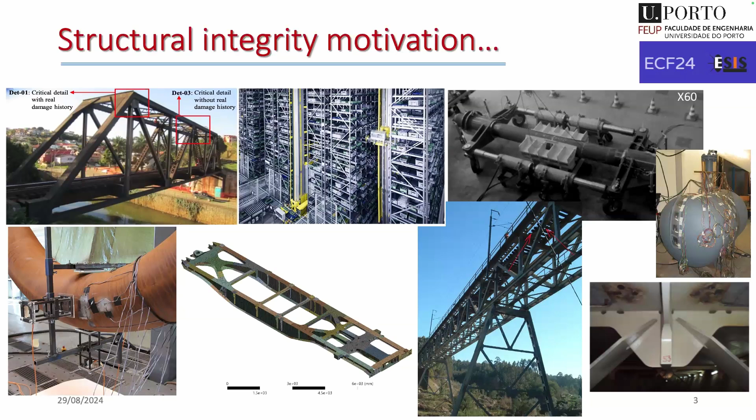So this is the way we get funds for our research.

I will make my presentation according to these topics. I will start with some introduction to the local fatigue approaches. Then I will show you some developments that we were involved in as a team regarding these local fatigue approaches, with some focus on modeling fatigue uncertainty. This is one of our topics.

Then I will jump to a more recent activity in our team that has been very discussed this week in this conference, which is ultra-high cycle fatigue. We are doing some activity in this, and I will show you some of the most recent results that we are generating. Then I will jump to the structural integrity case studies, where we try to solve different problems, applying the local approaches.

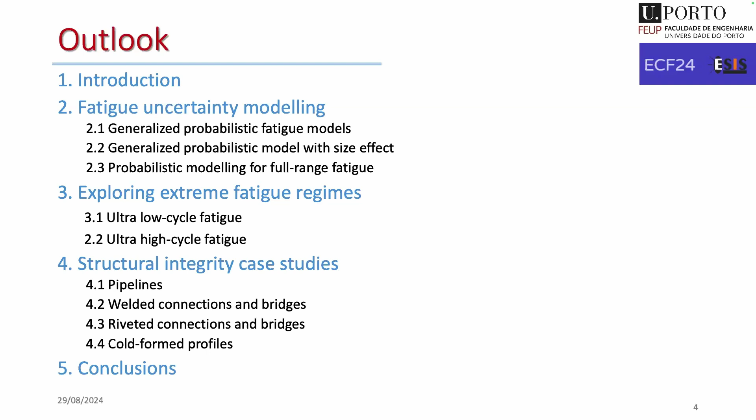Also solving some problems of scale, because when we are analyzing large structures and we want to apply local fatigue approaches, we must overcome the scale problem between the size of the structure and the need to characterize locally the fatigue parameters.

Regarding introduction, everyone here knows what the local fatigue approaches are, but just to give some background information. Traditionally, when we want to make structural integrity design or analysis relying on design codes, we are often directed to the application of global approaches, which are simplified versions for fatigue analysis.

In this case, the stresses, for example, are nominal, which means that we are far from the hotspot where the fatigue damage will start or evolve. These are the global approaches, which currently are still the basis for many design codes.

Anyway, design codes are evolving, and some codes are already incorporating some approaches closer to the local approaches, particularly including more local stress definitions like the geometric stresses, the structural stresses, or the hotspot stresses. So this is, in my opinion, a way going to the local approaches.

And maybe it's where most of us are working in our research: developing local models for fatigue assessment using local fatigue parameters, which are more consistent with the nature of the fatigue damage, which is very localized in the material.

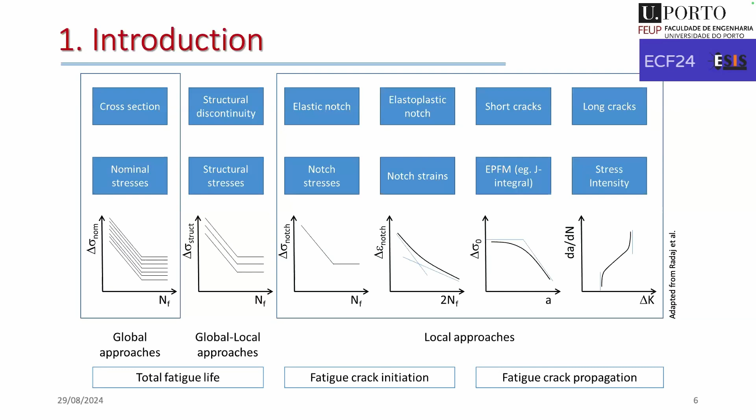For example, fatigue crack initiation could be one of the focus. Sometimes in other applications, we are more concerned about fatigue crack propagation. And sometimes we try to combine those approaches to get a full fatigue life prediction. So this is what I understand, in my feeling.

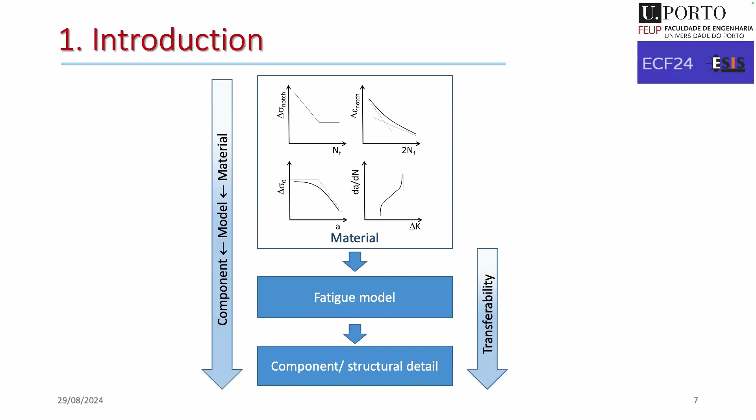The issue is that we start with material characterization, and then we need a fatigue model. And with that, we can predict the fatigue of a structural component. So that's what I call the transferability problem between the material and the structural component or detail. That's what I will try to show how we are doing in our team later on in this presentation.

So local approaches, as I said, most of us are working in that topic. It's almost a world inside this. Anyway, I believe we still have work to do. There are still challenges to overcome in the local approaches. So there is an exhaustive list of challenges that we need to address.

Complexity of modeling is a problem when we are challenged by industry to give clear answers about, for example, structural integrity of a bridge. Can we go to the grain scale modeling to provide that answer to the industry? This is a challenge, because if I go to the grain scale, maybe I will not provide the answer within the time I have to give to the industry.

Also, that will require very high computational resources that we must have available to provide the answer to our customers. So usually local approaches face the complexity in modeling much more nowadays, which requires in parallel high computational intensity.

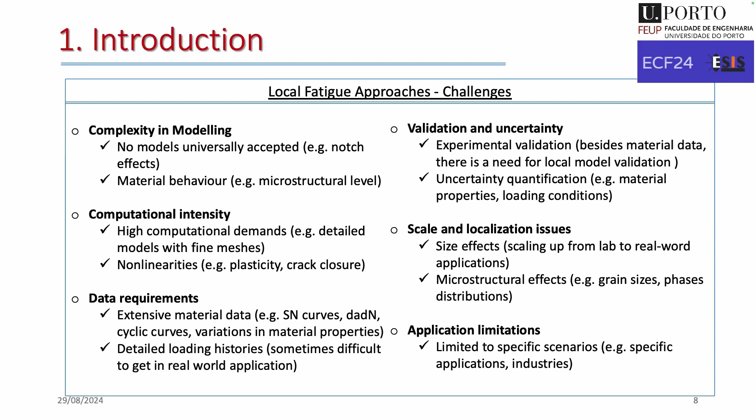We always have the problem of scale and localization issues when we start with the material and want to go to the structure. And sometimes our models are limited to specific fields, case studies, or industrial requirements.

Before going directly to the structural integrity case studies I want to show you later on, I will first go through the modeling of fatigue uncertainty, and then I will talk about some research work on extreme fatigue regimes.

As I told you, our work has been done in collaboration with different partners across the world. We started a collaboration about 20 years ago with Professor Canteli and Professor Castillo from the north of Spain. They developed a simple and powerful probabilistic model based on the well-known Weibull distribution, but for fatigue analysis.

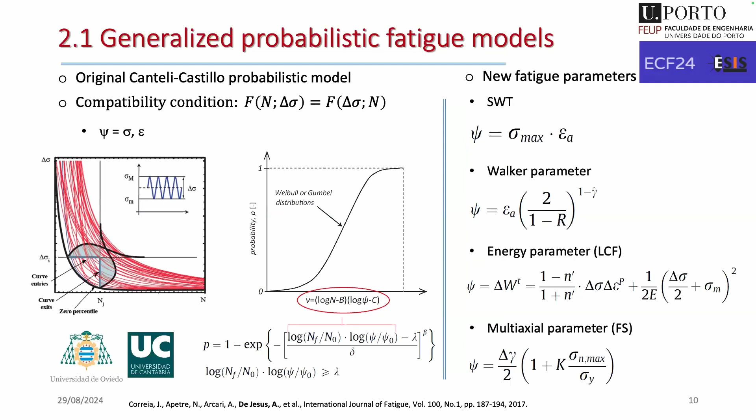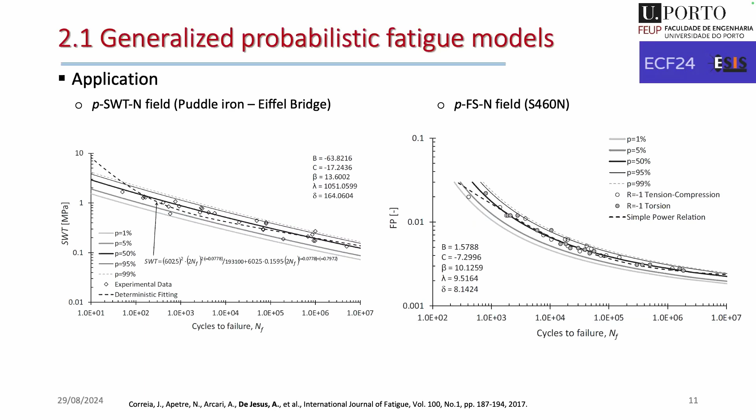So this was immediately explored in different fields and different materials. For example, materials from old bridges in Portugal with the SWT parameter, or multi-axial fatigue with structural steels were explored.

Afterwards, we applied this fatigue S-N field, though it could use different parameters on the y-axis, to model the fatigue behavior of notch components, assuming that the fatigue life is a propagation of a crack, and that crack propagation results from successive crack reinitiations across a crack path. Starting with the material model, we were able to predict the fatigue S-N field for the notch component.

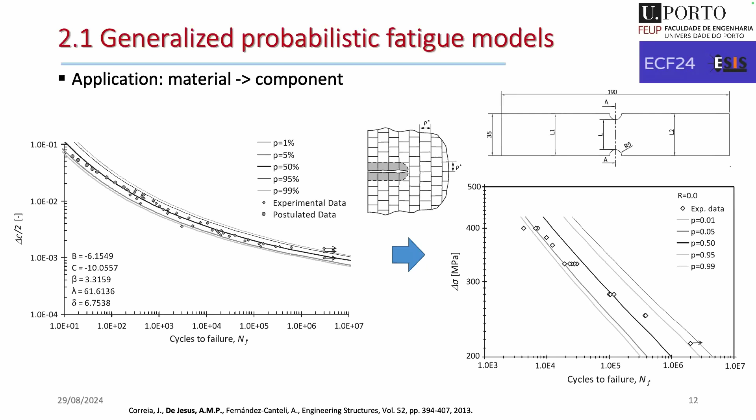A next step in this analysis was: the Weibull model was proposed early on for describing fracture stress in brittle materials. So we can benefit from that Weibull model description with our new fatigue parameter. This generalized parameter lets us benefit from the scale parameter, and we can approach fatigue prediction while accounting for scale effects or size effects.

So this delta parameter could be extended to this version, giving us our probabilistic model with this new perspective for size effect. This allows us to predict the reduction in fatigue strength as size increases, and also the scatter reduction for the same size increase.

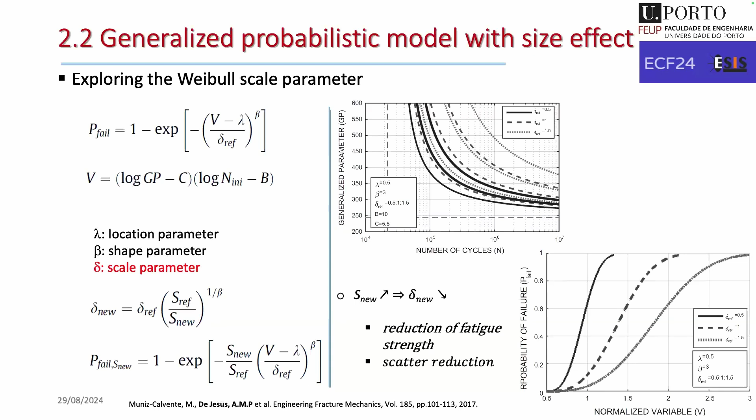Doing that, we started to model the fatigue behavior of some components—at that time I was working on riveted joints, so we modeled the fatigue behavior of riveted joints starting with the material properties, beginning with simple, smooth specimens.

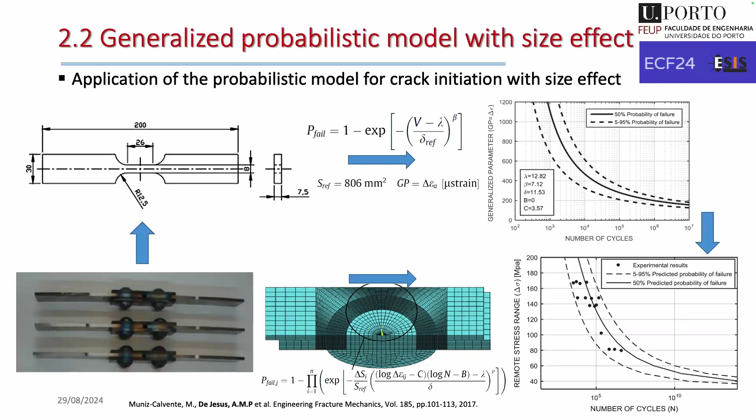We test those specimens and extract the reference probabilistic S-N field. Then, using numerical modeling of the joint and the weakest link theory, we're able to predict fatigue crack initiation for this riveted joint, as you can see on the right. So starting with material characterization, we jump to component prediction.

With this model, we can evaluate, for example starting with the fatigue parameter, a very simple strain range distribution over the surface of the riveted plate. We can get risk maps for the plate—for any given stress range and number of cycles, what will be the risk of failure of this component after this history.

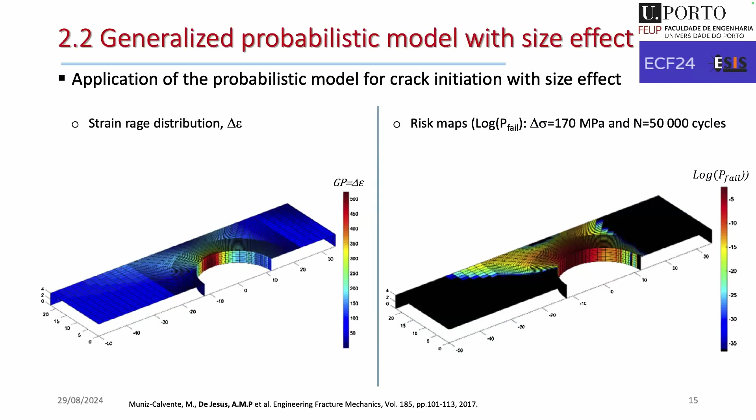One of the shortcomings of the original model proposed by Castillo and Canteli—well, actually it was understood in the original version as a shortcoming, but later we realized it might not be so. We can see here this hyperbolic S-N field, and this vertical asymptote seems to be physically inconsistent.

The other asymptote, the horizontal one, is okay because it resembles the fatigue limit of the material. And we should expect, when talking of the full S-N field, a sigmoidal representation for the material's fatigue behavior when using a stress-based fatigue parameter.

But after some considerations, we realized this model could be a transformation of that one. How can you do that? Simply by providing a new fatigue parameter.

So we can work with the maximum stress normalized by the material's tangent stiffness for the cyclic curve. As we move into the plastic behavior of the material, this normalization parameter will reduce significantly, and theoretically for a perfectly plastic material it will go to zero, giving us this asymptotic representation.

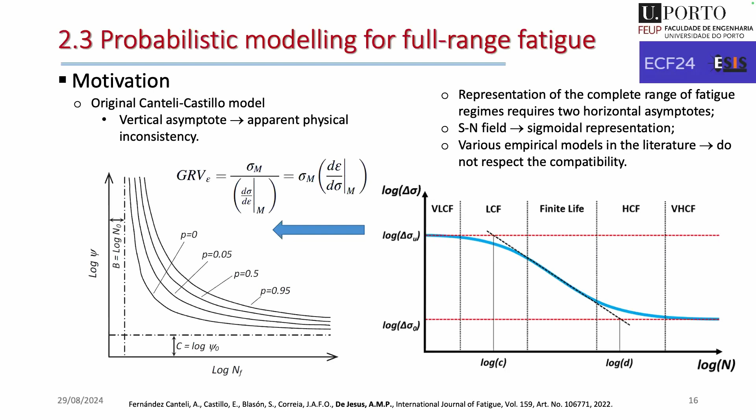So in the end, this makes sense—this hyperbolic representation can be used to jump to the sigmoidal representation. This was tried with existing data at the time; for this case, for the pressure vessel steel, we started with data.

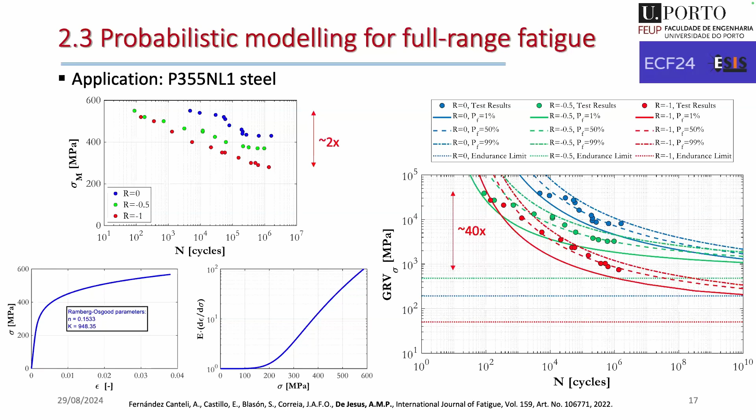In this with the maximum stress, we have a vertical range of test data of 2 times. When we make the transformation I referred to previously, we can extend this to 40 times. So we are retrieving the hyperbolic representation of our S-N field, as originally proposed by Fernandez, Castillo and Canteli.

So these are some experiences regarding the generalization of the existing probabilistic model by Canteli and Castillo. Now we were trying to explore the extreme fatigue regimes, and one of the regimes we were exploring was what we call the ultra low cycle fatigue.

Why this study? This was actually a European project interested in this topic. The objective was to investigate the behavior of, for example, pipelines under extreme loading conditions, those that appear under seismic actions. In that case, the failure of the material could happen very early, before 100 cycles.

For that, we believe we are not talking of low cycle fatigue classically speaking, but in this fatigue regime, as you can see on the bottom fractured surfaces, we have a mixture of crack propagation and some dimple formation, which is typical of static ductile failure. So we believe that in this region, traditional low cycle fatigue approaches like Coffin-Manson will not work properly. This is already documented in the literature, that Coffin-Manson will overestimate fatigue life predictions in this very short time duration.

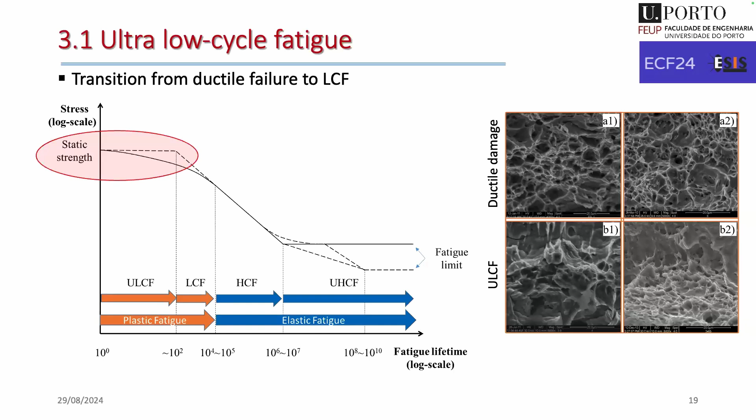In this European project, we already published a book with all the data. I'm just opening a small window into our work, so you can find a lot of testing data there, including full-scale tests, which are very rare, that you can benefit from in this book.

We also played with different models. We used continuum damage mechanics coupled models to address material damaging in this fatigue regime, which is affordable because we are talking of around 100 cycles, so it's possible to integrate the equations for that duration.

But today I bring a simpler model, just to make it easier to demonstrate the background idea of modeling in this fatigue regime. So here I'm talking of an uncoupled model that relies on very precise cyclic plasticity modeling—this is mandatory, otherwise we will fail in our predictions. Then we make some post-processing using this uncoupled model to try to anticipate what will be the crack initiation.

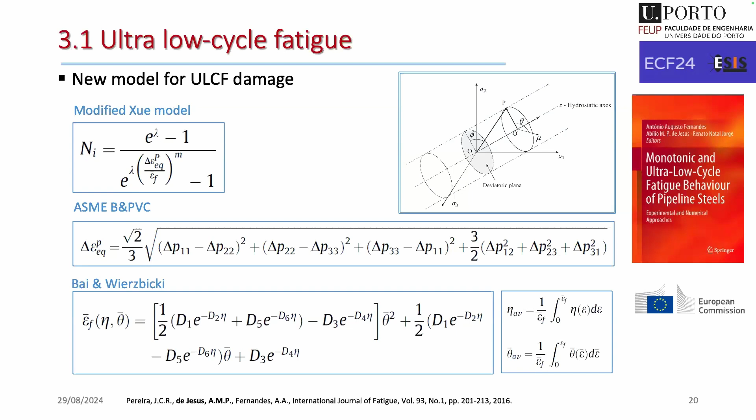For characterization and identification of the model, we rely on two sets of tests. First, on the left, we need static tests. Those static tests are important to define the fracture surface, or ductility surface, of the material, where we have fracture strain plotted against triaxiality and Lode angle, and you can see this is not constant for the material. Then we also need to run cyclic tests.

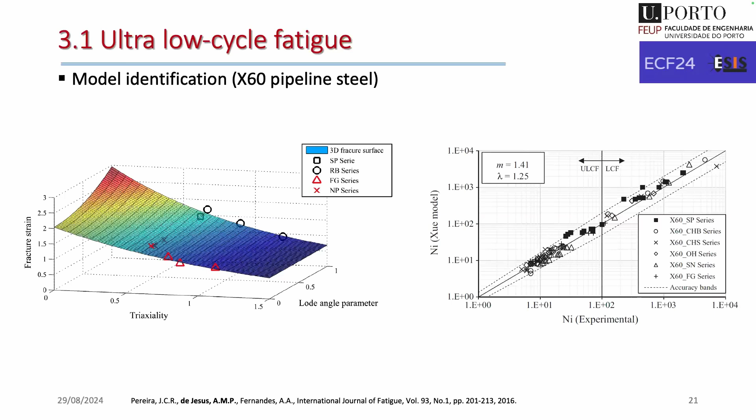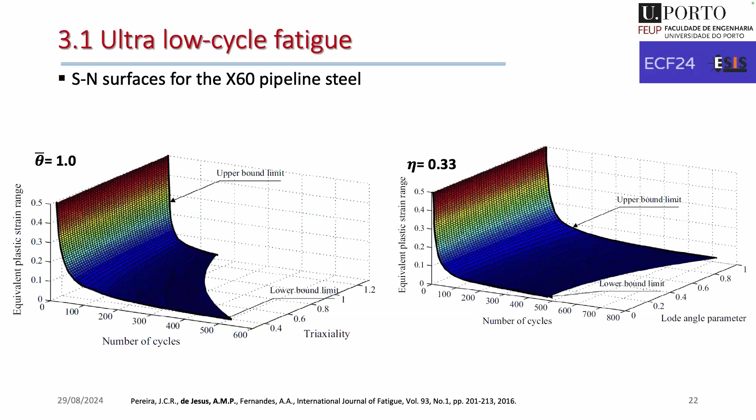Ideally for different stress concentrations or different triaxialities, in order to identify our model constants. With that, we can achieve a new idea for fatigue crack initiation in this fatigue regime, characterized by these surfaces. So we will have S-N surfaces where we are adding an extra dimension—triaxiality or Lode angle parameter—giving us a multi-dimensional surface for fatigue crack initiation characterization.

I will come later to this modified model for ULCF in the applications, when I show you some applications to pipelines. Now I will talk of more recent data. I was thinking to remove this from my presentation because it's supposed we should bring some more consolidated work, but anyway, I take the risk and bring some very fresh results about gigacycle fatigue that we've been working on for just 2 years or so. I'd like to share some advancements we are doing.

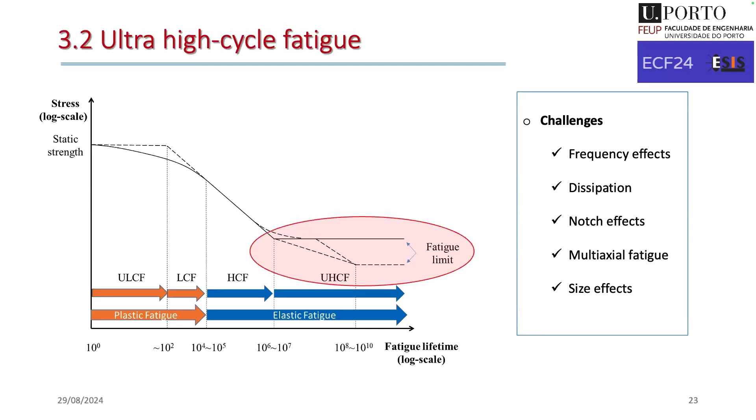There are a lot of challenges when we are doing gigacycle fatigue. We have frequency effects, dissipation, notch effects, multi-axial fatigue, size effects - all of this we need to address also in the gigacycle regime. Otherwise we will be very limited on the information we are generating. We are trying to solve this step by step. For the moment we just have preliminary results.

One of the challenges that I never heard people discuss so much is about dissipation. Everyone runs the test as if perfectly without any issues, but we don't feel that way. When we change material, dissipation will be different and we will have heating that we need to control. Otherwise our test will be rubbish.

We recently developed a thermal model that gives us information about whether dissipation will be an issue or not. We can use our test itself to get the damping coefficients of the material, and then injecting that in the heat transfer problem, we can get the prediction of the temperatures of our material.

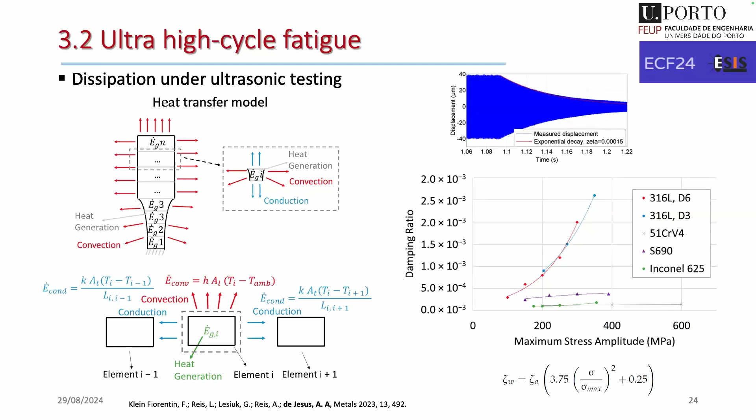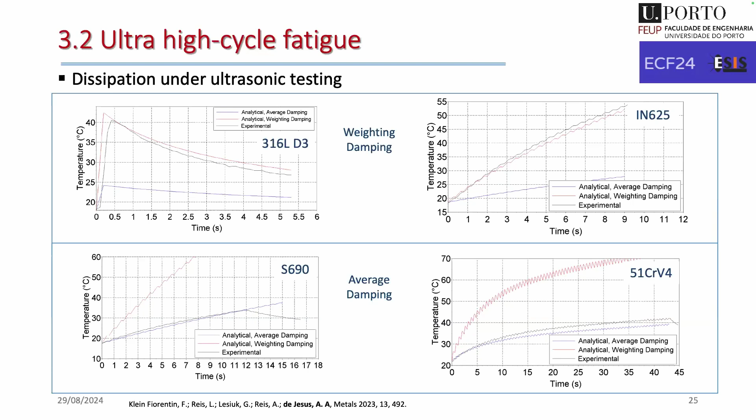We found that, maybe this is classical work, but for us it was interesting to demonstrate that depending on the material, the microstructure will change with the applied stress. So the damping coefficient is nonlinear with stress for some materials, while for others we can use an average damping to estimate the temperature. Using that, we were able to estimate the temperature evolution in the material before doing a very comprehensive characterization.

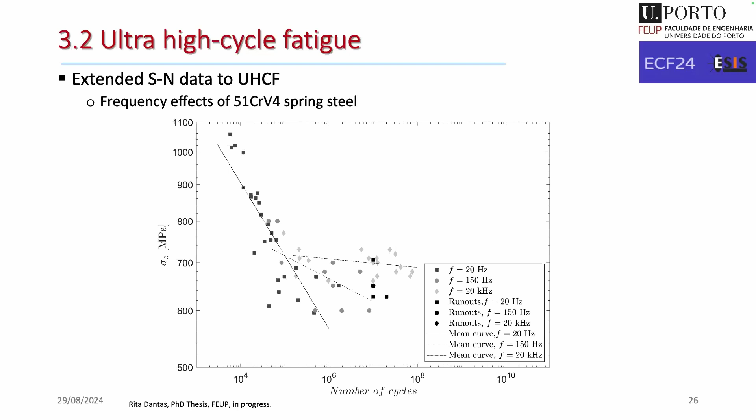Then the frequency effects - we all know that, and we are trying to get a phenomenological model that overcomes this issue. We have tests for spring steel for 20, 150, and 20 kilohertz. We see some influence of frequency that we are trying to overcome with a more complex regression model, going back to the basic model from

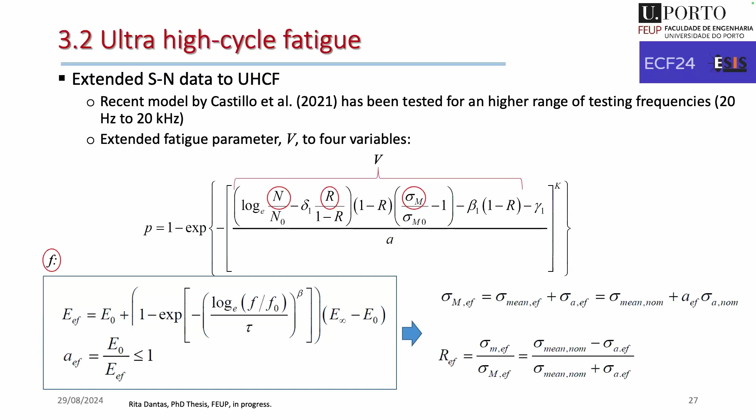Canteli and from Castillo. It's possible to change the V variable to a more complex one, in this case four variables, where the frequency appears implicitly through the influence of the elasticity properties of the material. This is a more intricate model but opens a lot of possibilities - we can get our S-N field for a wide range of fatigue lives, benefiting from different sources of data, and of course we are making a transformation in our fatigue parameter.

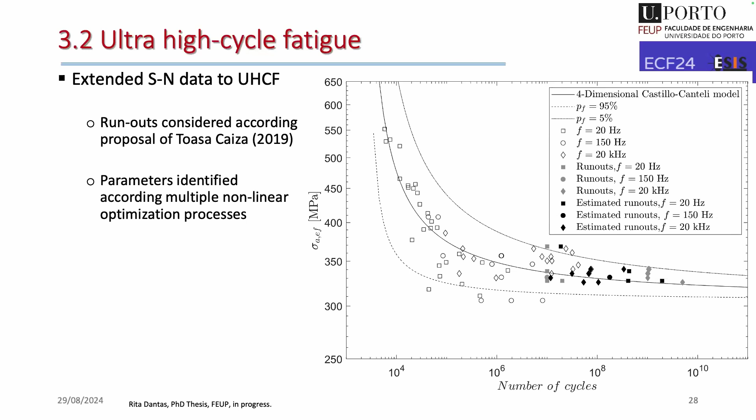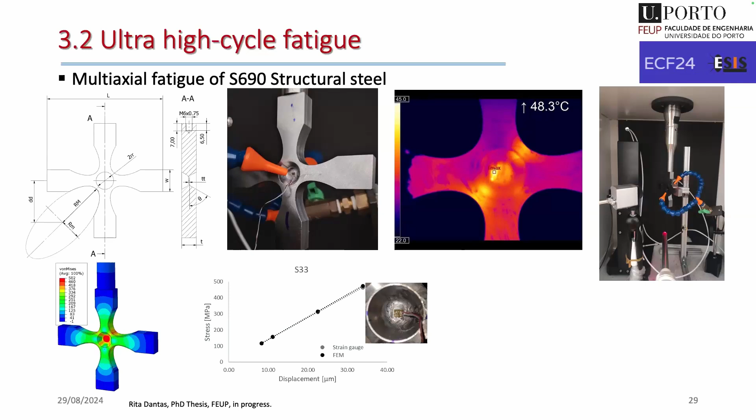Recently we succeeded in getting some multi-axial fatigue results - these are just preliminary results in the gigacycle regime, using cruciform specimens. We have some valid cracking in the specimens, but we still have to work and explore further. We will have to face the frequency effect, and in my opinion we'll also have to face the problem of the size effect.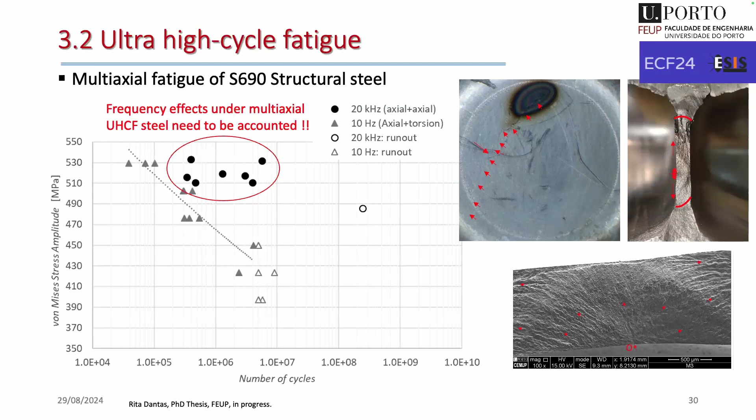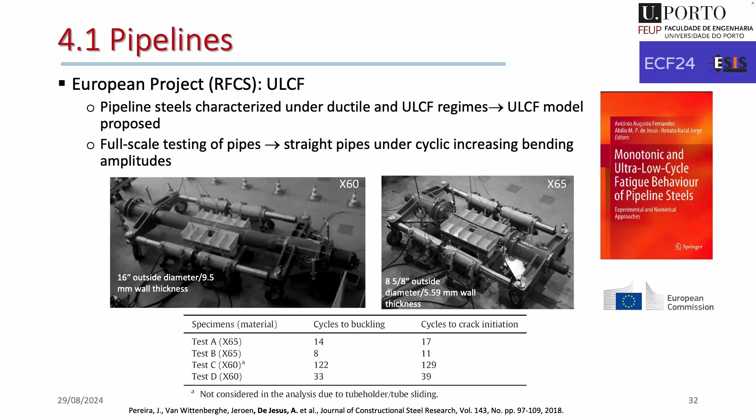Now I will run over our case studies very quickly, just to give you some highlights - sorry for rushing through this presentation. The first case was the pipelines again. In our project, we were able to run full-scale bending tests of straight pipelines and elbows - elbows are in the book. We were able to predict the fatigue behavior well with our model.

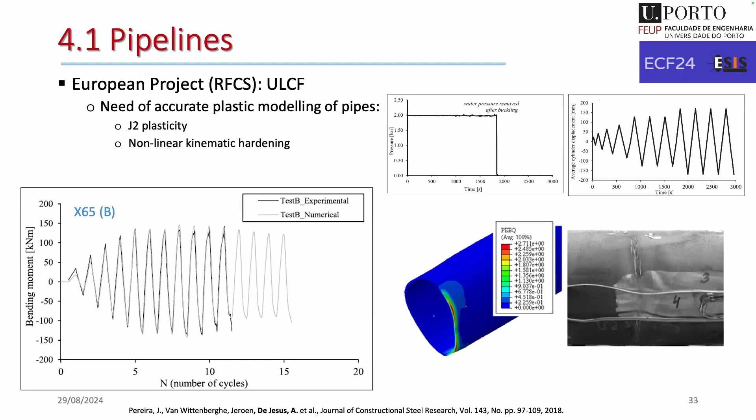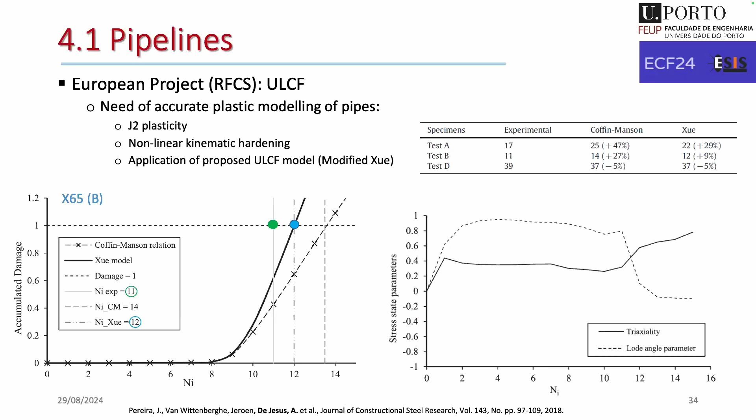But as I told you, we need to first model very precisely the elastoplastic behavior of the pipe. Most important is to capture the plastic instability, because as soon as you get plastic instability, your triaxiality will increase, the Lode angle will decrease - all of this pushes toward reduction of material ductility, which speeds up failure. So we were able to improve predictions regarding the overestimation from the Coffin-Manson approach.

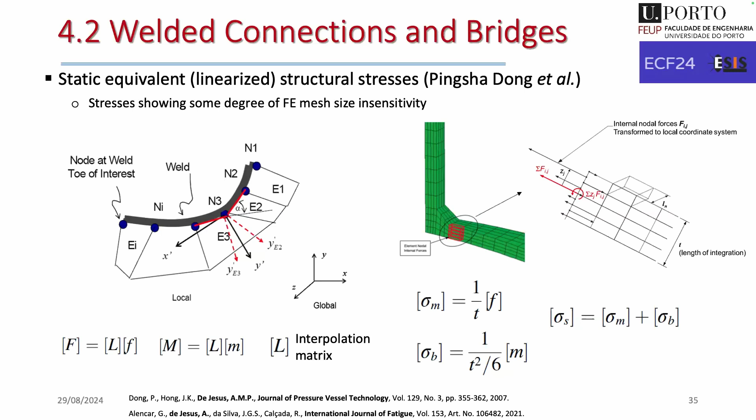Regarding now just a brief story about welded connections - I started some time ago a collaboration with the United States, with Battelle Ohio Institute, with the group of Pingsha Dong. At that time, Pingsha Dong developed the structural concept for stresses, which are defined as equilibrium equivalent with the nodal forces of the finite element model. In that way, the idea is to get some mesh insensitivity for the structural stresses definition.

Integrating the crack propagation law, accounting for the small cracks effect, and accounting for the stress intensity magnification factors for details typical on details, we were able to reach a master S-N curve with a new definition for the structural stress, which accounts for the stress linearization, the loading type, and the size of the plate under analysis.

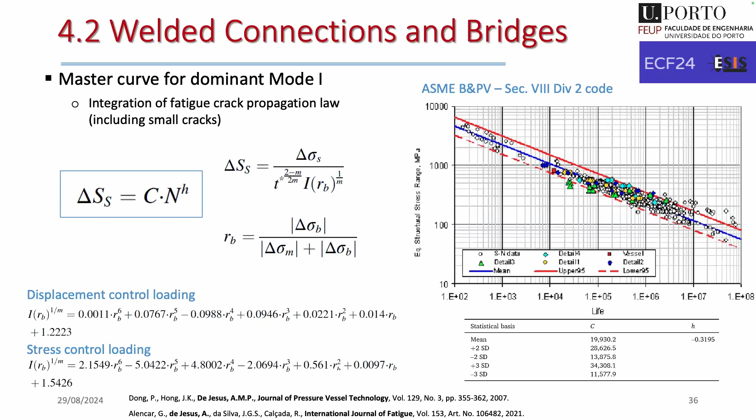With that, we were able to demonstrate that it worked for pressure vessel components. The colored points were from my team. This was a database that nowadays is the basis for design codes.

More recently, we improved the model, including the multi-axial approach. We also developed some post-processors for ANSYS in this case, that is open for use if you wish.

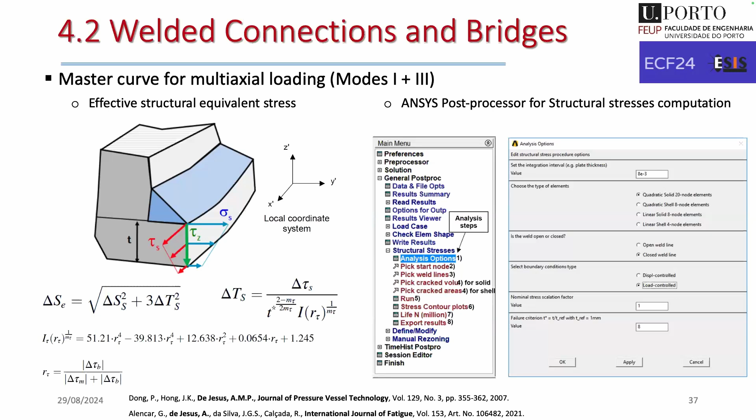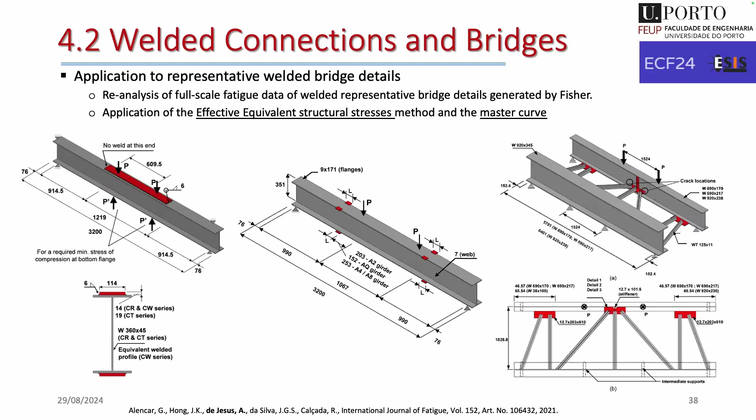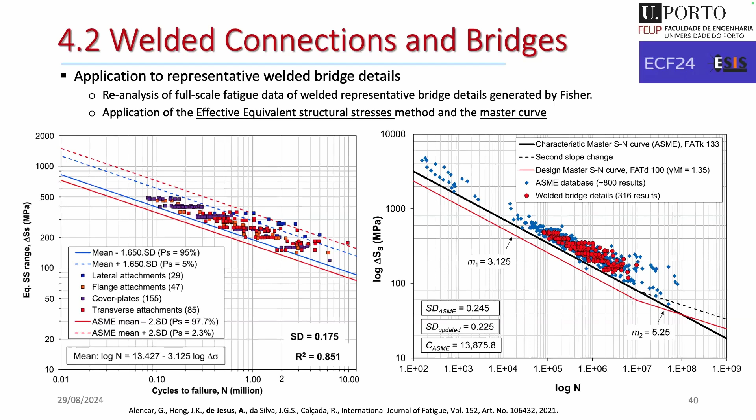And then we ran a lot of analysis on all data regarding full-scale welded details of bridges. That data was run for bridges because we believe the details are different from the pressure vessel technology. But again, we demonstrated that with 300 new results, the master curve concept works perfectly, so it could be extended to other design codes for bridges if you wish.

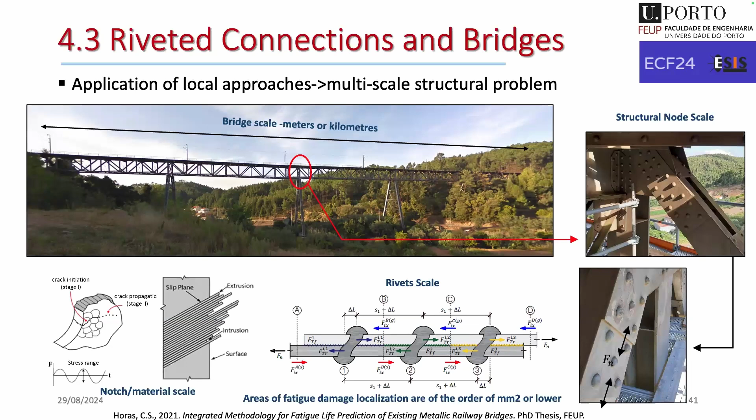So finally, I'm almost finishing. Just to say, we also have this big problem of how to make the fatigue analysis of such large structures. We're talking of a multi-scale problem, but in a different way than we heard this week in other lectures. We must address the full size of the bridge, but supporting local models, so we need to go at least to the scale of the rivet hole, not speaking about smaller scales.

We're talking of a structure under very complex loading - trains crossing the bridge induce dynamic loads, and at the end we want to reach the stresses or fatigue parameters at these spots. So the idea was to do submodeling in different scales or different steps, using modal superposition. This is the way to speed up our calculations - otherwise we would not be able to run the analysis in real time.

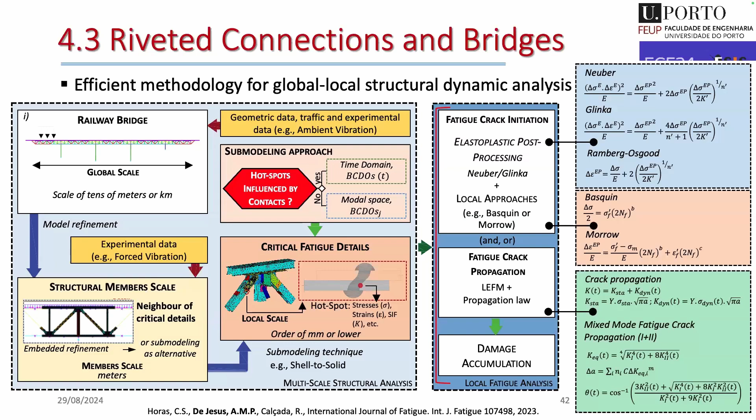Of course, we have some local nonlinearities that make the challenge even higher. So sometimes we cannot solve our last submodel in the modal space - we need to run the submodel in the time domain, which increases our computational costs.

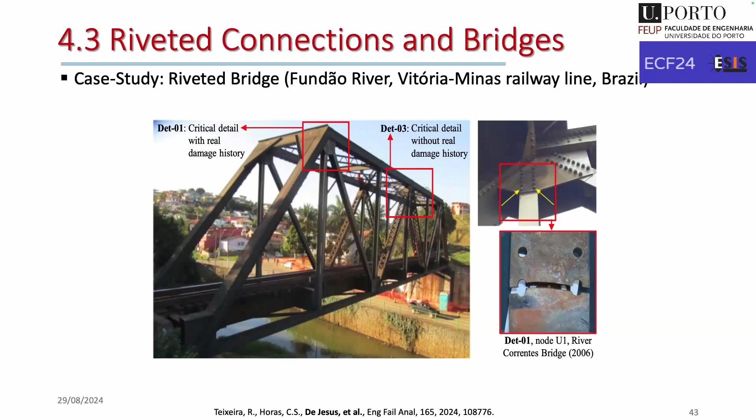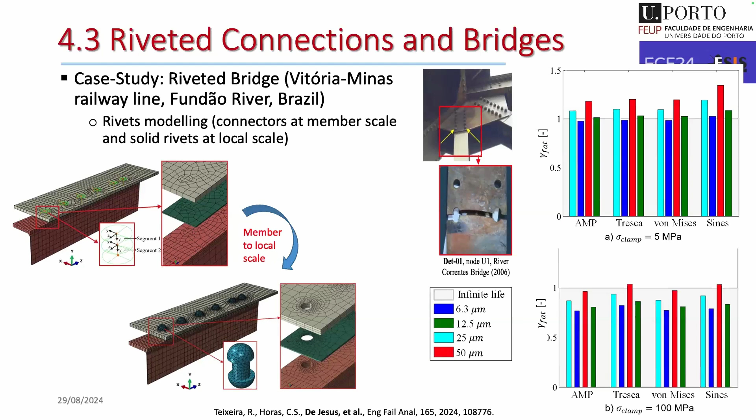This was explored in different applications like riveted bridges, for example in this case in Brazil, where some failures were detected. With some modeling and mitigation strategies, we were able to demonstrate that that local damage would be expected for the bridge.

Finally, the last case is the structural integrity of rack structures. The idea here is to develop new design rules for these structures made by cold form profiles. This is not available in our European codes, okay? They are prepared for hot roll profiles, not cold form.

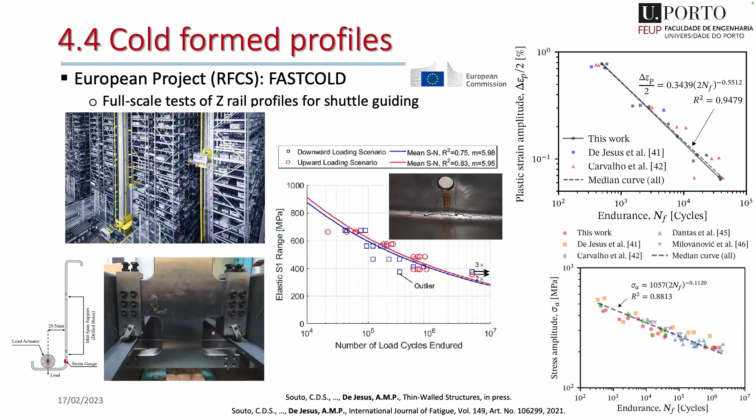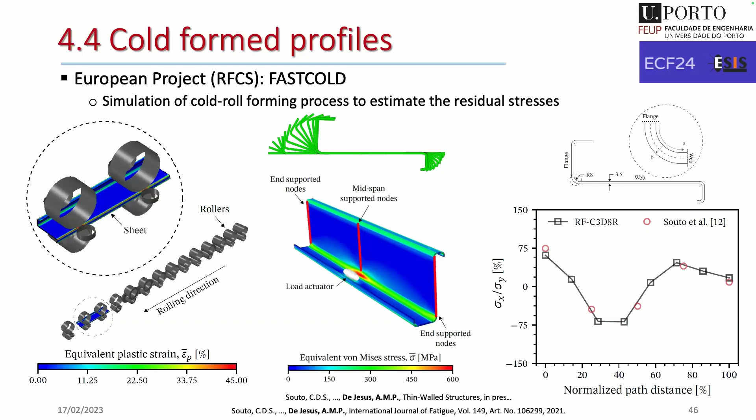But the basic idea is that, in order to get the proper prediction, we should use local approaches and, very importantly, account for residual stresses. So in this case, we modeled the process of the profiles' production in order to get the profile of residual stresses, and in that way we are jumping into what we call an acceptable accuracy band for the predictions.

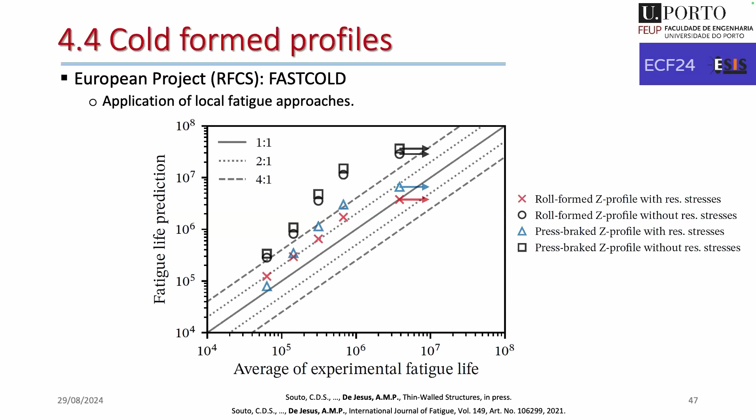These red crosses were considering the residual stresses from roll forming. If we adopt, for example, residual stresses from press brake profiles, which is not exactly our process, it will not work as nicely as we should expect.

Okay, the conclusions are very simple. I understand that local approaches provide us very high flexibility when we are interested in structural integrity. So we have, in our team, improved some existing probabilistic models to get a generalized application of those models. We are also extending the perspective for the S-N fields, and we have so far been successful in providing answers to the industry, to different industrial partners.